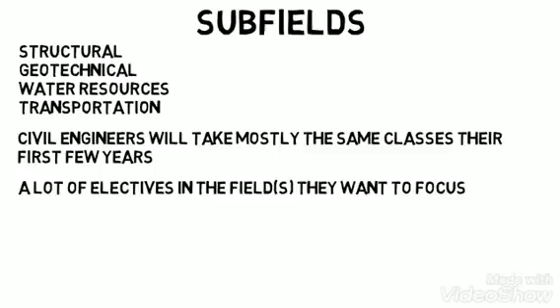First, structural engineering is about calculating and understanding the forces, strength, stability, and so on within a structure. It could be a bridge, a skyscraper, a landmark, or even a spacecraft or aircraft. Remember, these structures are very heavy and need to support their own weight so that they don't collapse. Now this subfield is the most math intensive and has lots of physics.

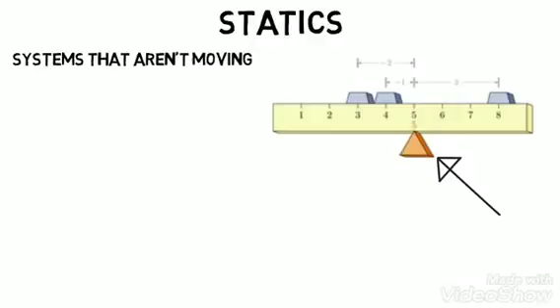All civil engineers will take a class called statics, which is all about the forces and systems that are not moving. In basic physics, you may have done a statics problem, like where does this support have to be for the system to be totally balanced and therefore not moving. You summed all the forces which equaled 0 and all the torques which equaled 0. And that's the basics of statics.

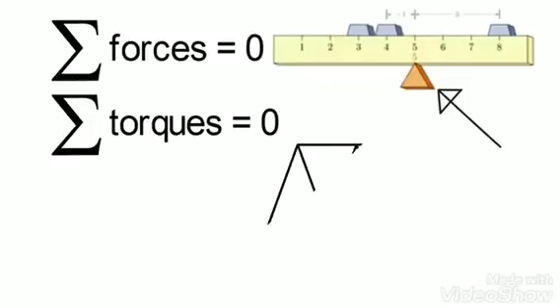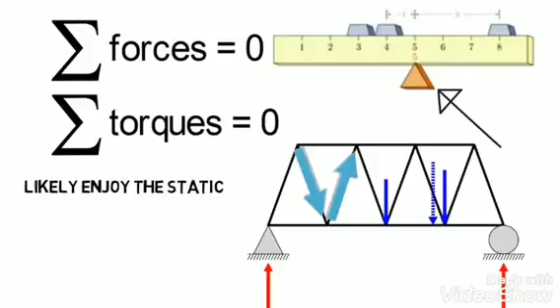So if you're looking at the forces within a bridge or truss, well, the same principles apply, but now there's just more to it. The weight is straight down as shown in blue, all the beams exert forces on one another, but the sum of them is equal to 0, and the torques sum to 0 as well because the bridge is not moving. It's of course even more complicated than this, but if you enjoy that kind of basic physics you see above, then you'll likely enjoy the statics and physics you see in structural engineering.

So that's just a very simplified explanation, but now let's dive into some of the classes they would take. One class that would be important for structural students is a reinforced concrete class. In concrete structures, they reinforce it by putting steel beams in the concrete. We can't see those beams, but here, before construction is done, you can see them sticking out, or you can see a lot of them on these unfinished columns.

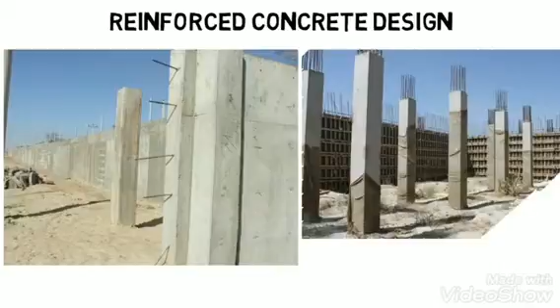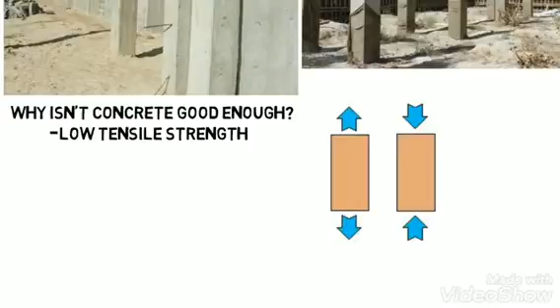So why do they do this? Why isn't concrete good enough? Well, concrete alone, once hardened, has low tensile strength, as in it does not handle being pulled very well. However, it's okay with being compressed. But to counteract that low tensile strength, they add steel beams and pour wet concrete, which hardens around them, and then those steel beams have high tensile strength to counteract those types of forces on the structure.

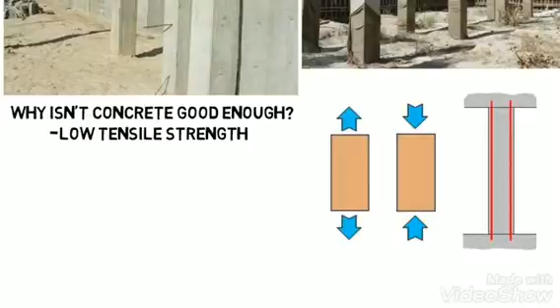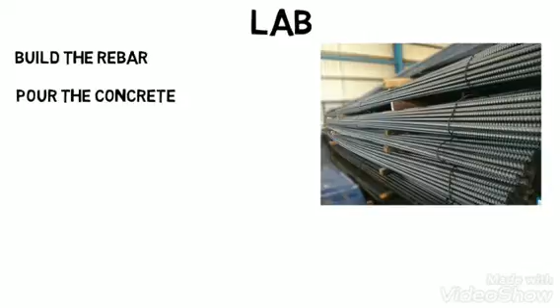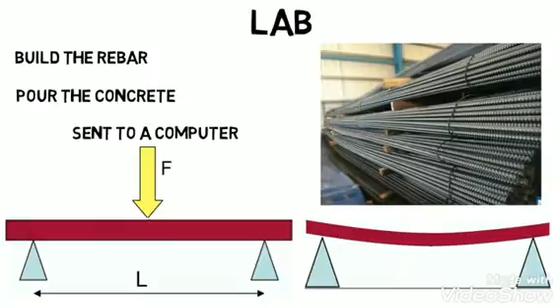So in a lab for this class, you might build the rebar, or the steel reinforcing rods, pour the wet concrete onto them, then once it dries, use a machine that holds the beam on both sides, then apply forces in the middle and keep increasing the force until the beam breaks or cracks and starts falling apart. That force being applied is sent to a computer that tells us the loading on the beam so we can collect the data and get the properties that we need.

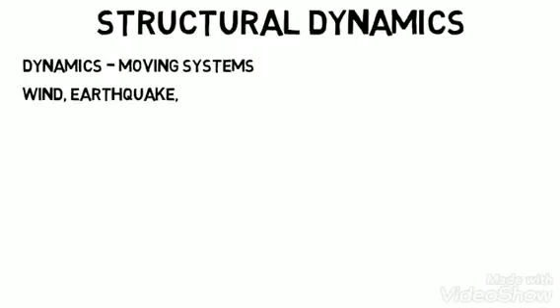You could take structural dynamics as an elective class. Dynamics is about moving systems, unlike statics. So this is one of the few classes where motion is included. So whether it's wind or an earthquake that shakes a building, you need to know how that motion will impact the structure itself and all the forces within it.

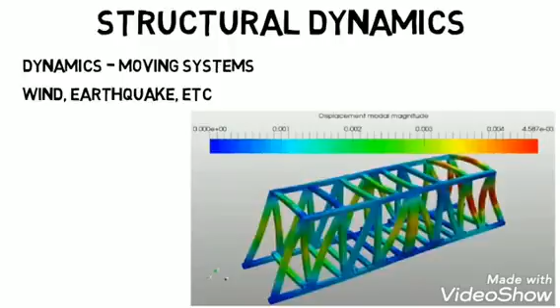I've shown this animation before, but mostly for mechanical engineers as it's a vibrating system that they can analyze, but civil engineers could get into this as well. They have to make sure their designs can stand up against any type of movement the structure may be subject to. You could take an elective class on seismic analysis, which is specifically about calculating the responses of a structure to an earthquake, or one on bridge engineering, which would be a class on highway bridges, materials used, distribution of loads, and how forces are spread throughout the structure, and so on.

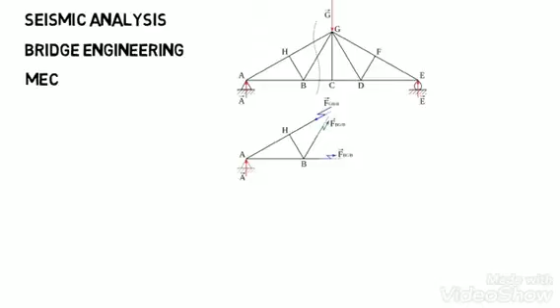Mechanics of materials, like how twisting and bending a beam or column causes it to become internally stressed. Timber structure design, which is about analyzing properties and forces within wooden structures, and much more. See how even if you choose structural engineering, you could still take many different classes from the other structure students? It's a very broad major, but hopefully you really get the idea by now.

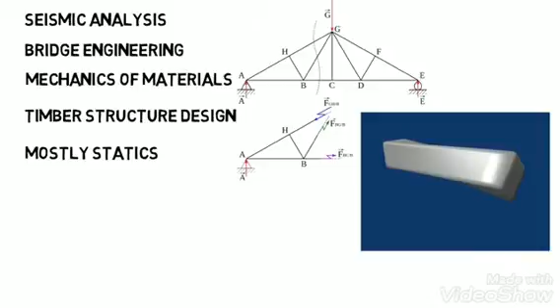You may still have to do hand calculations, but most of the rigorous analysis you learned in school will be left to the software. Now let's move on to geotechnical engineering, and you'll already see how different these disciplines are.

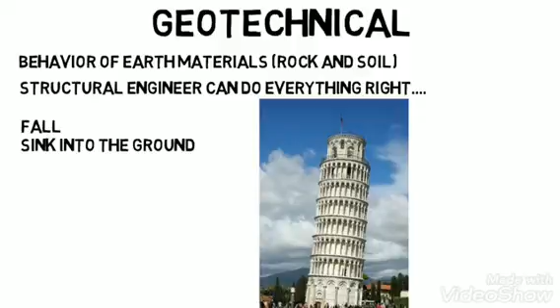Geotechnical engineers are concerned with the behavior of earth materials like rock and soil, but the main focus is soil. This may seem odd, but you'll see how important this is. The structural engineer can do everything right to make sure the building will stand up, but if the geotechnical engineer messes up and you put a structure on soil that can't withstand it or is uneven, the building could fall, sink into the ground, or even lean to one side, probably the most famous being the Leaning Tower of Pisa, which was a result of soil issues.

Then they also have to consider the foundation of the structures that are being designed. Should they have a shallow foundation or a deep foundation? You may not realize it, but our houses and all the buildings you see have foundations that go underneath the earth to keep the structure as stable as possible by transferring the weight from the structure to the earth.

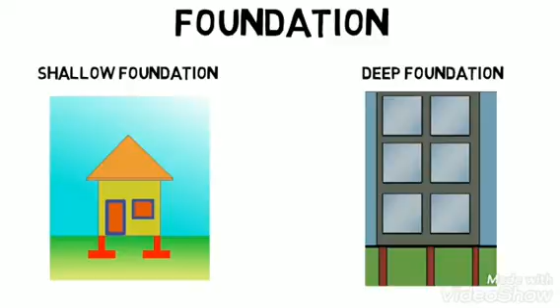But geotechnical engineers rely heavily on testing. So a lab you might see in college is to go out as a class and collect soil samples around your university and bring them to lab. You would have to classify it, like is it sand, gravel, clay, etc.

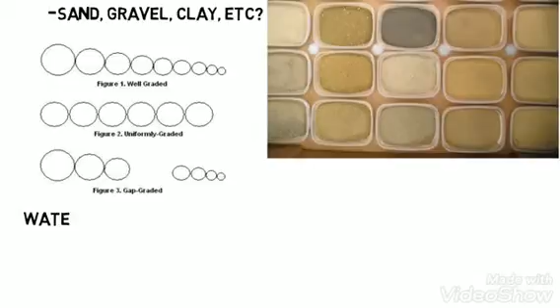There are many soil types, and you may have to look at the grain size or how it reacts to water. You determine its water content by analyzing the sample, which will be comprised of solid soil, water, and air of different masses and volumes. But most importantly, you'll measure how the soil will react to mechanical loading or to different forces acting on it.

So you might perform a triaxial test, for example. Too complicated to explain for this video, but essentially you put the soil in an enclosed area and apply a force or load to the top, which pushes down on the soil. Then pressure sensors measure the pressure at different points to see how the soil is being affected.

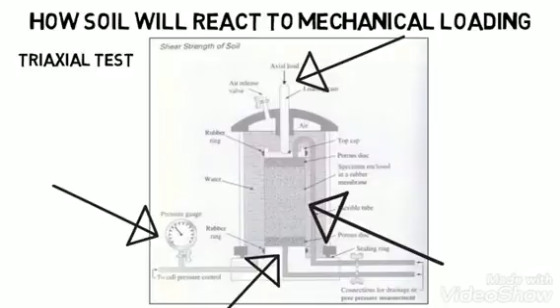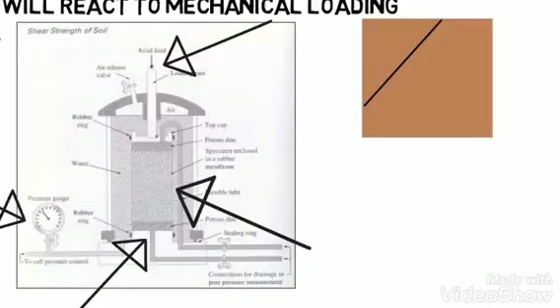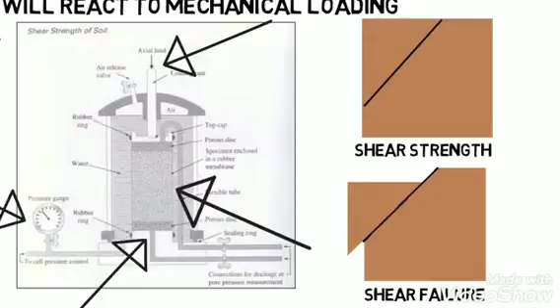If you imagine a square sample of soil and you add a force to the top, the soil can fail along some weak plane. Basically, the weight overpowers the friction holding the soil particles together, and the soil will start to slide, which is known as shear failure. Its ability to stand up to this is known as shear strength, which is one thing that the triaxial test on the left tests for.

And this leads us to what a career in geotechnical engineering could be like. You might be the person who goes out to the field where a structure is going to be built and collects soil samples all around the area for testing. Or you could do testing at the field.

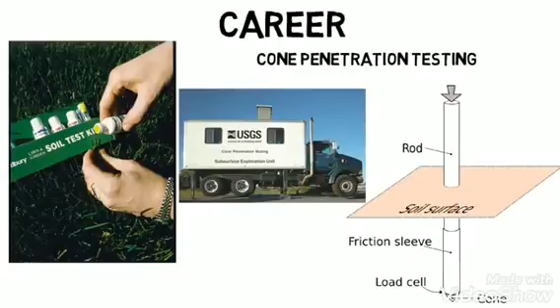One of the most used tests right now in this field is cone penetration testing, where a large truck goes out to the field which has all this equipment on it, and a cone is pushed into the soil, and the pressure will be monitored by a computer on the truck as it moves through the soil into the earth. Based on the pressure, you can analyze the soil mechanical properties.

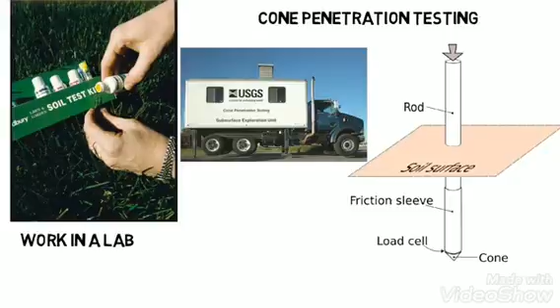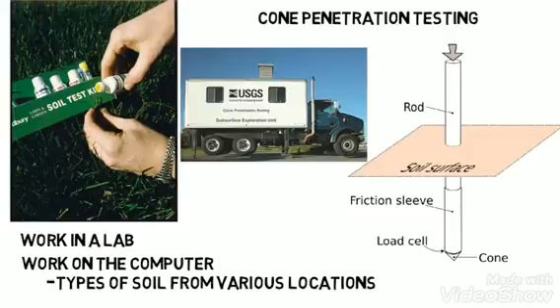Or maybe you could work in a lab where you would do the testing on the soil after it's been collected, like I showed with the triaxial test. Or maybe you could work on the computer and input the different types of soil from the various locations at the site, so you can digitally lay out the area that the structure will rest on. So you could be in the field, in the lab, or on the computer.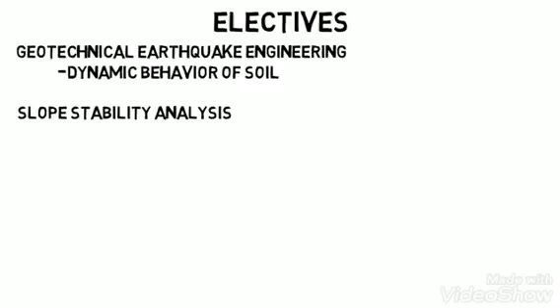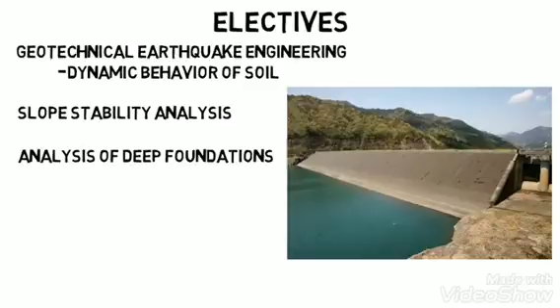Your elective classes could include geotechnical earthquake engineering, which would be like learning the dynamic behavior of soil as opposed to the structure itself. Then slope stability analysis and how to safely design structures on slopes. An example would be an embankment dam. Analysis of deep foundations, where the structure goes deep into the earth for a stronger support, like for skyscrapers. And of course, there are many more classes.

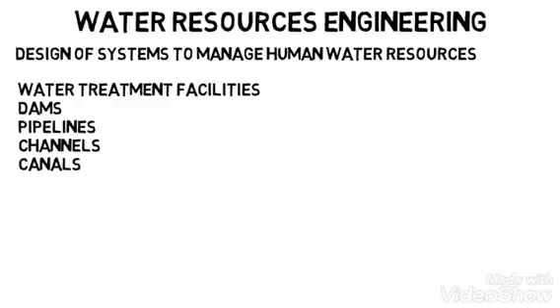Now let's move on to water resources engineering. This is about the design of systems to manage human water resources. They can work on a water treatment facility, designing dams, pipelines, channels, canals, and so on. Maybe you have to design a storm drain system in the event of a large storm. Where is all the water going to go, and how will you get it to the ocean efficiently?

Or you could design a canal, which is an artificial waterway to transport water for irrigation, or can be used for ships and boats. Or you could design a culvert that will allow water to flow under a road or trail or some other obstruction.

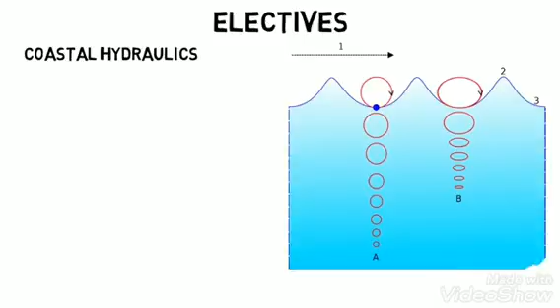Elective classes you could take include coastal hydraulics, where you learn about ocean wave propagation, submerged pipelines, seawalls to protect human habitation, and so on. Or open channel hydraulics, which is about fluid flow in an open channel as opposed to a closed channel or pipeline.

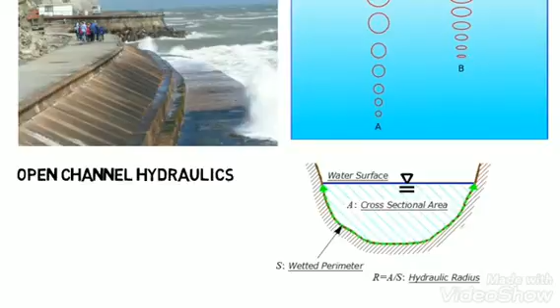And last is transportation engineering. This is about safe and efficient movement of goods and people. These are the engineers who design streets, roads, highways, railroads, public transportation systems, and even airports.

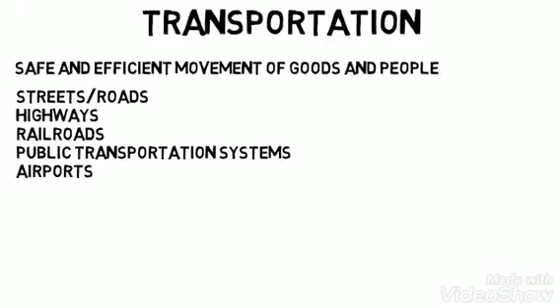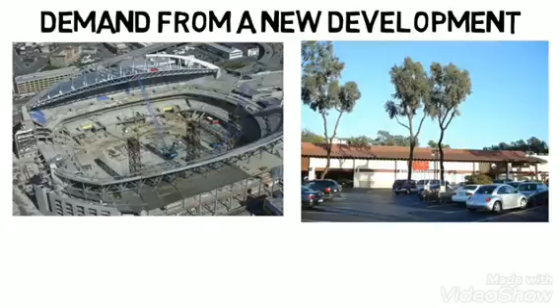So maybe this engineer has to look at the kind of demand from a new development, whether it's a new stadium in your city, all the way to a new grocery store in a new location. This is going to cause new types of traffic throughout the area. The engineers would try to optimize how the new development impacts existing traffic.

They would look at data from other similar places to see what kind of traffic they get, then try to make improvements where possible. It could be simple like adding a bus stop in the nearby area, all the way to expanding the roadway to allow for more traffic.

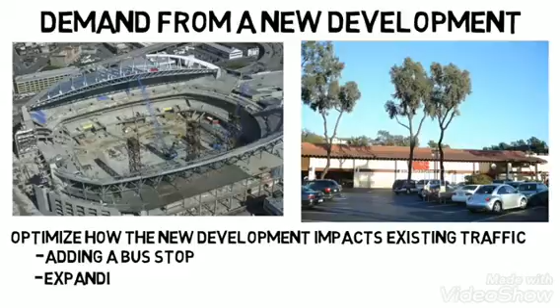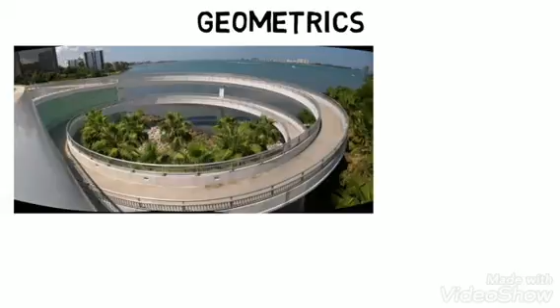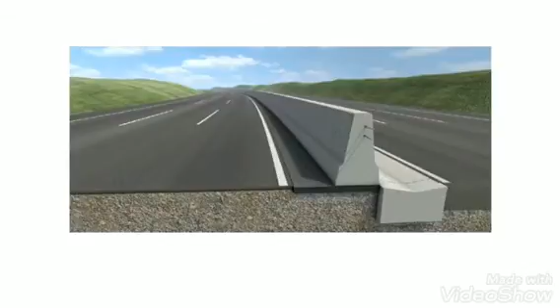They could work on the geometrics of the roadway, such as what radius of curvature does an off-ramp have to be for a car going 55 miles per hour so the tires won't slip. Or if they're going up an incline, the driver needs to see far enough ahead of them to stop if there's a sudden obstacle. Or what do the cross sections of a freeway need to be for the lanes and the shoulders to accommodate the amount of traffic that's expected?

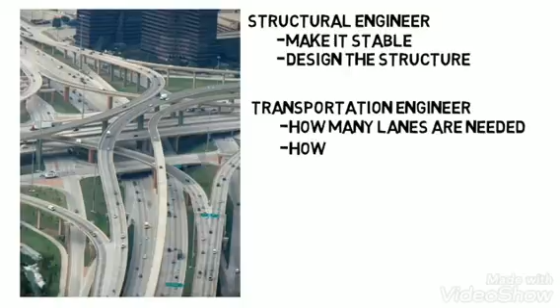Or let's say a highway interchange is being designed. A structural engineer would make it stable and design the structure itself, but the transportation engineer would determine maybe how many lanes are needed for the interchange based on traffic, or how the merging should happen to maximize safety. They make sure that the layout is designed to maximize traffic flow and safety rather than the physics of the structure itself.

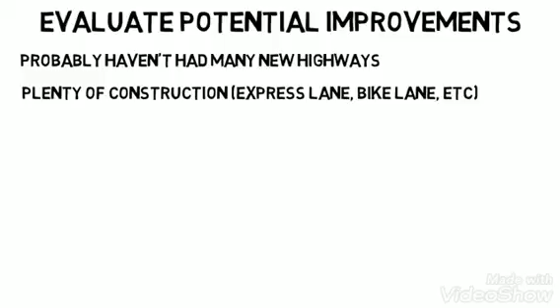Often these engineers evaluate potential improvements to cities in terms of transportation rather than create a totally new design. As in, you probably haven't had many new highways put into your city in the last few years, but there's probably been plenty of construction, whether it be adding an express lane or a bike lane, etc. So they might not create a new bus transportation system, but they may optimize the existing one.

Maybe they take data from how many people get on the bus, how long the bus takes to complete its route, how long people are waiting for the bus, and so on to optimize the route, the amount of stops, and more.

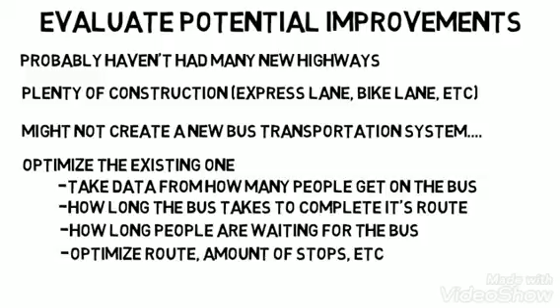Your career will also likely involve a good amount of computer work. You might have to create a layout of the new lane, off-ramp, bridge, or whatever you're designing on AutoCAD, which is a very important software for civil engineers.

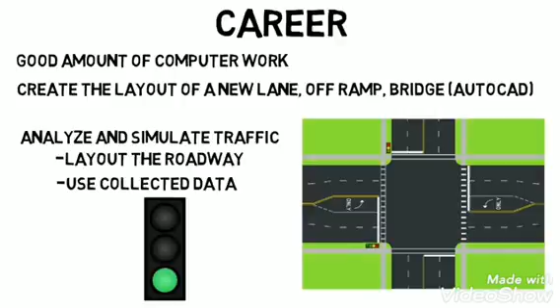Or you could use software to analyze and simulate traffic. You could actually lay out the roadway of a city and use collected data of traffic during different times of the day and simulate new additions. Like you could add in a stoplight somewhere and see what the new traffic would be like. Or you can make a minor change, like make a certain stoplight stay green for just a few seconds longer and see how it affects traffic on those streets.

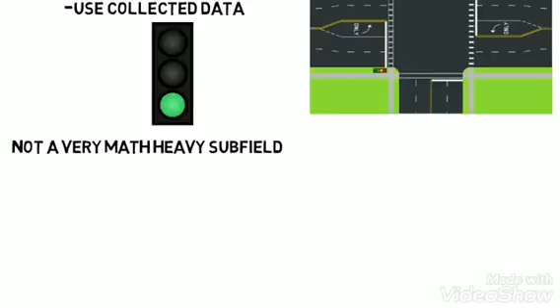And just note, this is not a very math-heavy field. In fact, it's probably the least math-intensive of the 4 subdisciplines I've talked about. It's more about taking data and analyzing it. Even when I talked about the radius of curvature and how fast someone should be going, you won't use the coefficient of friction and do circular motion physics or anything like that. You use even simpler equations to get what you need.

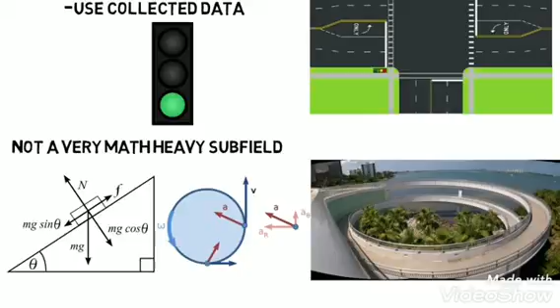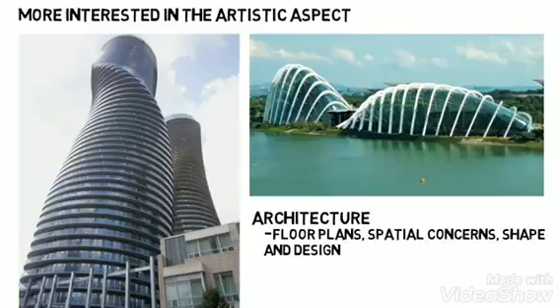Now that's all the main subdisciplines of this major, but there are some final thoughts I want to include. If you're watching all this and are more interested in the artistic aspect of building and structure designs, then architecture will be better for you. Architects deal more with the floor plans, spatial concerns, and the shape and design of the buildings. They have to have an understanding of structures and physics, but not quite as much as a structural engineer.

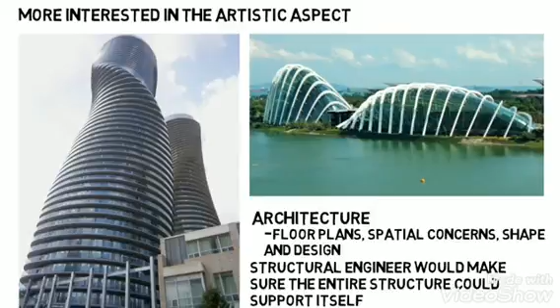They would hand off their design to the structural engineer, who would really make sure the entire structure could support itself, and they would deal with more of the technical work. Then, if you want to be the one who puts on the hard hat and does all the hands-on work with the machines and physically builds the structures, then construction will be better for you.

But then there's also construction management, which you can still get a job in as a civil engineer. Construction companies will hire civil engineers because of their technical background. Construction is the hands-on part, but construction management is more about guiding the construction, putting together schedules, budgeting, and figuring out how all the pieces will come together.